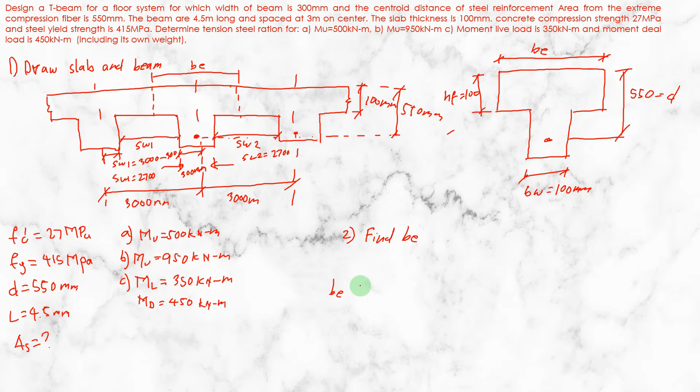So, BE is equal to BW plus 2 times 8 HF. Or in others, instead of HF, they use T for thickness of the slab, not beam. Or others use H. But to make it easier, we'll just use HF consistently.

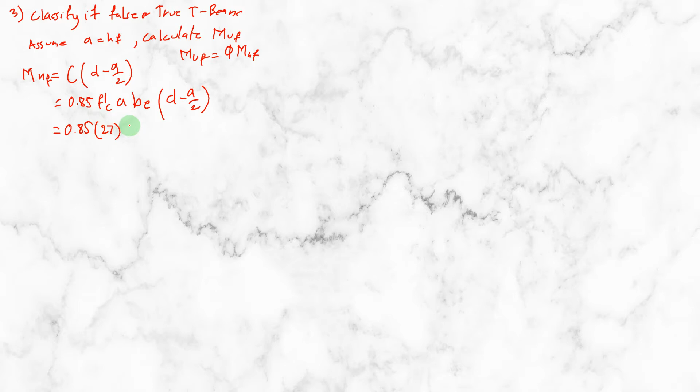So we label it with F for flange only. Then if we equate this capital C with the equivalent equation, which is 0.85 f'c, times a, times b. Instead of B, we use BE, the effective width of the T-beam. So BE, d minus a over 2. Since we assume a is equal to HF, so 0.85, 27 is our concrete compression strength, then a which is 100, 850 here, 550.

Since ang a natin is 100 divided by 2, 50. So ang lalabas dito na MNF natin is equal to 975.375 kilonewton meter. So ang lalabas dito is 975 million, kaya lang i-divide nyo siya ng 1 million para magiging kilonewton meter. Kasi ang unit pa lang natin dito is newton mm.

Ngayon, ang kailangan natin, alam na natin yung MNF, hindi natin alam yung phi. Para sa phi, check for stress. So i-check natin yung stress nito.

Yung alam natin, yung a which is 100, beta 1C, alam natin yung a which is 100. Yung beta 1, hindi natin alam yung beta 1. Kaya lang meron naman tayong table para sa ating beta. Ito yon.

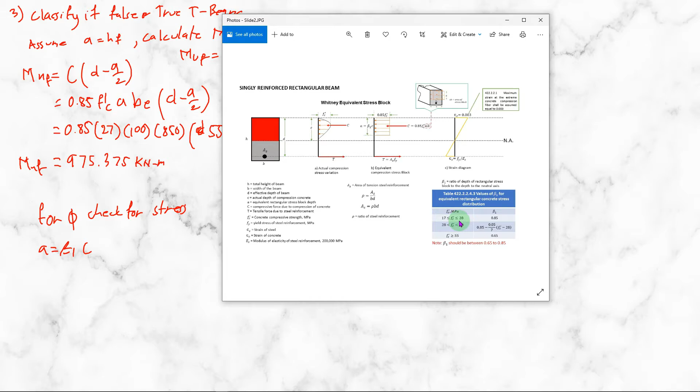Since yung compressive strength ng concrete natin is nasa gitna ng 17 MPa at saka 28 MPa, so meron tayong beta na 0.85. Ngayon, alam natin yung beta, which is 0.85. Beta 1, 0.85. Makukompute na natin yung value ng C.

Yung C is equal to 100 divided by 0.85. Kakaroon tayo ng value na 117.647 mm. So remember, ito na naman yung equation natin na Fs is equal to

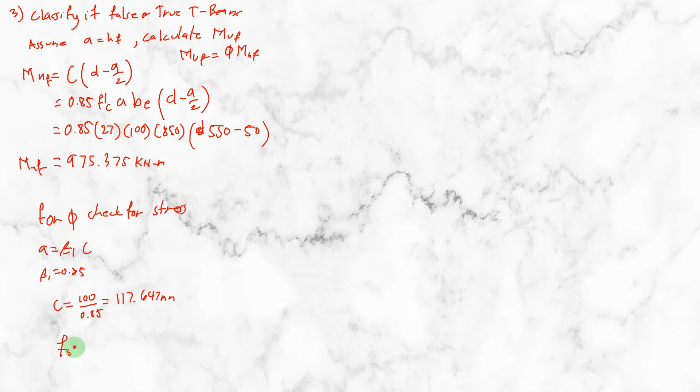D minus C over D. So 600, 550 minus yung C natin na 117.647, tapos 117.647. Yung Fs natin is equal to

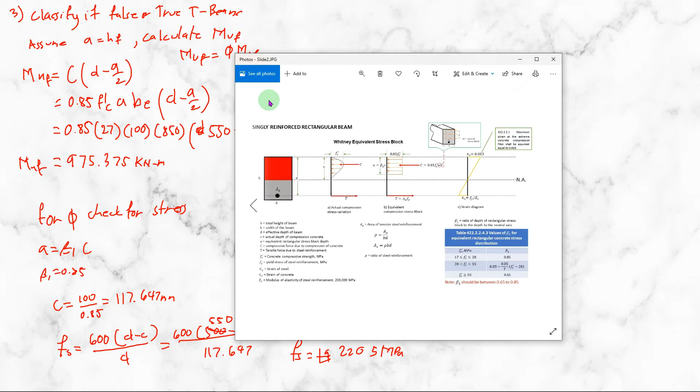Mali. Bakit 500 yun? 550 dapat yun, hindi 500. Recompute. So ang lalabas dito na Fs natin ay 2205 MPa. Ngayon, since ito yung na-compute natin na value ng Fs natin, titignan natin kung saang banda siya nag-fall.

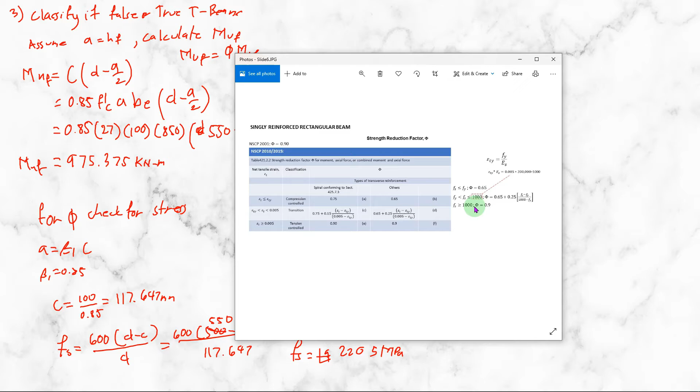Dito natin siya titignan. So yung Fs natin is mas malaki siya kumpara dun sa 1000 MPa. So yung phi natin is 0.9. So phi is 0.9.

Phi, dito na lang sa taas. So MUF is equal to phi MNF. So 0.90, tapos yung na-compute na natin, 975.375. MUF is equal to

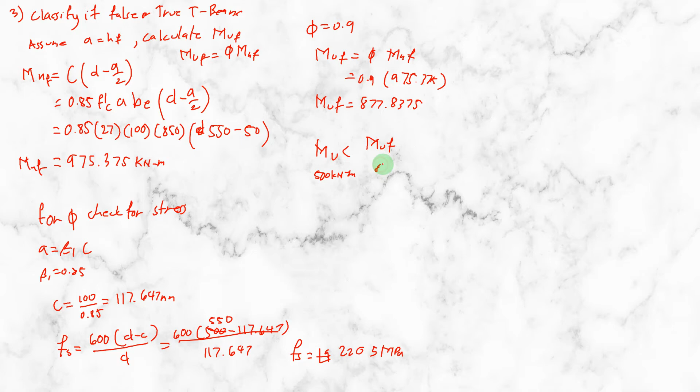877.8375. Dito pa lang, yung MU is less than MUF. Dito lang is 500 kilonewton meter, pero dito naman is 877.8375. So yung inassume natin na a is equal to HF ay mali. So a is less than HF.

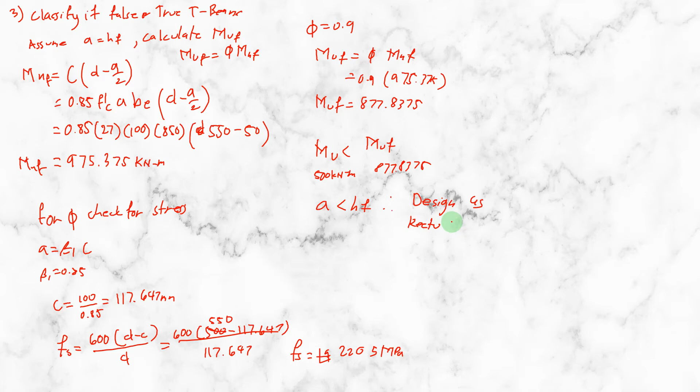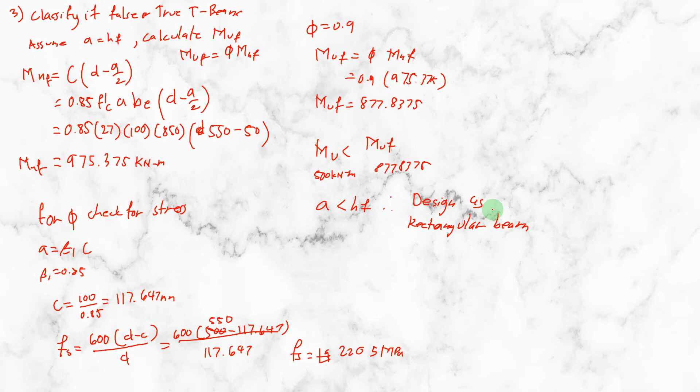So ano yung magiging conclusion natin dito? Design as rectangular beam. Dini-design na natin siya as rectangular beam. So para ma-design na natin siya as rectangular beam, design as rectangular beam.

Ngayon, ito yung tandaan nyo. Kung yung compression, o kaya yung E natin A, is less than HF o yung thickness ng beam natin, automatic na yun na tension controlled yung beam natin o yung section natin. So yung phi natin is equal to 0.9 kaagad.

Ano yung next na gagawin natin dito? Calculate yung ating MN. Ika-calculate natin yung MN natin para makalculate natin yung E o yung MNF, yung actual na MNF para doon sa flange natin. Hindi yung kinompute natin na value na equal yung E natin sa HF. Yung MNF na i-calculate natin is yung value ng A is less than HF.

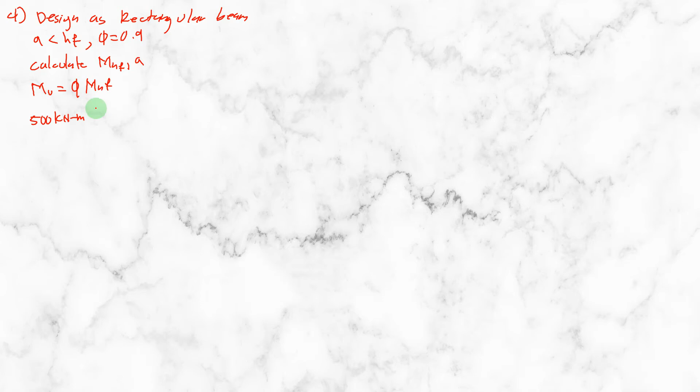Dun sa moment na 500 kilonewton meter, Mu is equal to 0.9 MNF. So yung moment natin dun sa flange is equal to 500 divided by 0.9. So meron tayong sagot dito, 555.556 kilonewton meter.

Ngayon, meron naman tayong equation na MNF is equal to C times D minus A over 2. Kung dito sa equation natin kukunin yung value ng A na to, yung A na hinahanap natin.

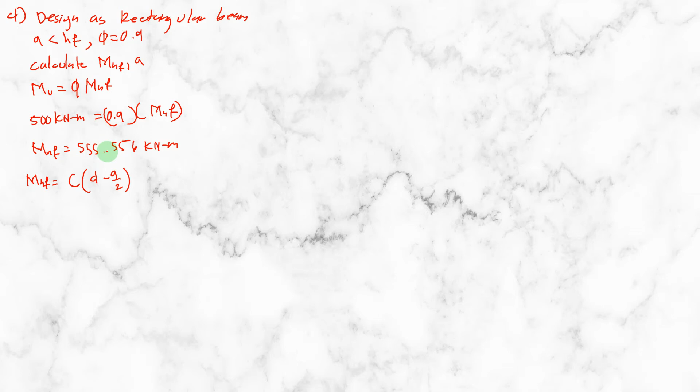So yung MNF natin, papalitan na natin yung MNF natin, i-convert natin siya sa Newton millimeter. So ita-times natin to ng 1 million. So magkakaroon tayo ng 555,556, tapos 00 Newton millimeter is equal. Yung C na to, ipapalit na natin yung equivalent equation ng C, which is 0.85.

Tapos Fc prime, ano yung value ng C prime natin? 27. Tapos yung E, hindi natin alam yung E, so i-blank lang natin na E. Tapos yung BE, instead na B dito, gagamitin natin yung BE na B effective, which is 850.

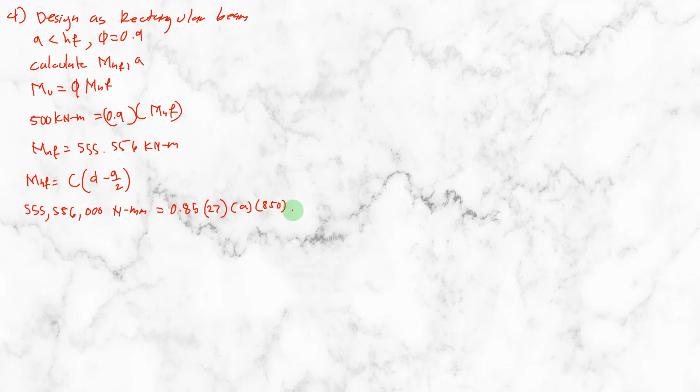Tapos, yung D natin, which is 550 minus A over 2. Kung papansinin nyo to, meron tayong quadratic equation. Kaya pag nilagay nyo to sa calculator ninyo, sa shift solve, titignan nyo lang kasi ang magiging lalabas nito is dalawang value. Meron kayong x1 at saka x2. Ang ipapalabas ng calculator nyo usually is yung x1, which is more than doon sa value ng HF, which is mali. Yung x2 yung hahanapin ninyo.

Pwede nyo naman gamitin yung manual computation, pero kung ayaw nyo, kung meron kayo nung calculator na may shift solve, palitan nyo yung niya, pindutin nyo lang yung sa may banda ng mode, tapos hanapin nyo yung equation, EQN, pindutin nyo yung 5, tapos meron na yung 3 para makita nyo yung ax squared plus bx plus c is equal to 0.

Yun ay para sa equation ng quadratic equation. So, ang kailangan nyo nga lang muna dito is i-equate nyo muna to. So, pagka i-equate natin to, ang lalabas dito is 9753750 a minus 9753.75 a squared.

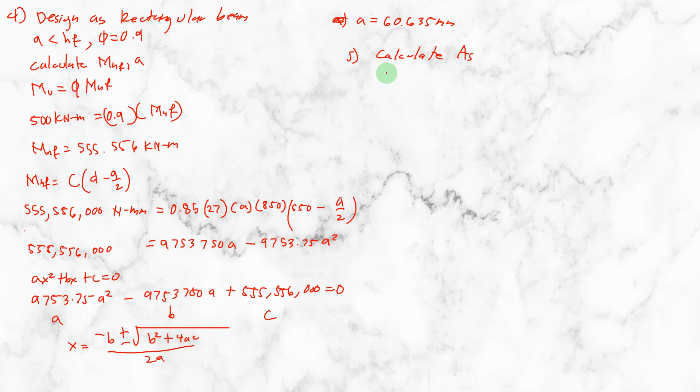60.635 mm. So, calculate 5, calculate AS. So yung AS natin is, para makuha to, is summation forces horizontal is equal to 0. Ito yung C nung flange at saka yung T sa tension. So kung i-equate natin to, 0.85 Fc prime a, yung BE is equal to AS Fy.

So AS is equal to 0.85. Ano yung Fc prime natin? 27. Yung a natin na 60.635 times yung 850 natin over yung Fy natin na 415. So AS is equal to 2850.21 mm squared.

So ito yung AS natin, pero hindi pa natin tayo tapos dito sa AS. Kailangan nating i-determine kung pasok siya sa minimum at saka sa maximum. So calculate 6, calculate AS min saka AS max.

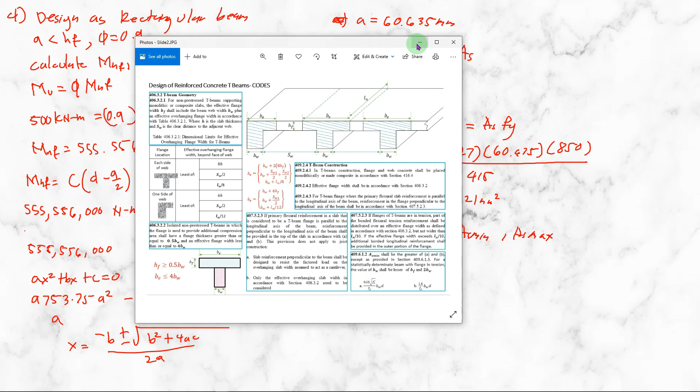So yung AS min natin is gagamitin natin yung ito, 0.25 is square root of Fc prime over Fy. Yung iba hindi, wala yung 0.25 dito sa taas pero nakalagay dito sa baba may 4. Tsaka ito, kung mapapansin nyo to sa rho, kung sa yung ginagamit natin noon na rho is ito yon, tatanggalin lang natin yung BWD na to, ito na yung rho. Kaya huwag kayong malilito doon. Pwede naman natin gamitin yung rho o kaya yung AS min. Kaya lang yung na-compute natin is rho kasi, kaya doon na lang, ang na-compute natin is AS, kaya AS na lang yung gamitin natin.

So AS minimum, it's either kung sino yung mas malaki dito sa dalawa. So 0.25 square root of Fc prime over Fy, yung B effective na BW natin times D. Tapos dito naman 1.4 over Fy, BW at saka yung D. Yung BW na to is yung width ng beam natin, which is 300. So 0.25 square root of 27 over 415 times natin sa 300 na BW, saka times natin sa 550.

Dito naman 1.4, 415, 300, 550. So ano yung lalabas dito sa dalawa na to? So ang lalabas dito is 516.49 mm squared. Sa baba naman, ang lalabas naman ay 556.63 mm squared. Kung titignan ninyo, mas mataas to. So, ito yung magiging AS min natin.

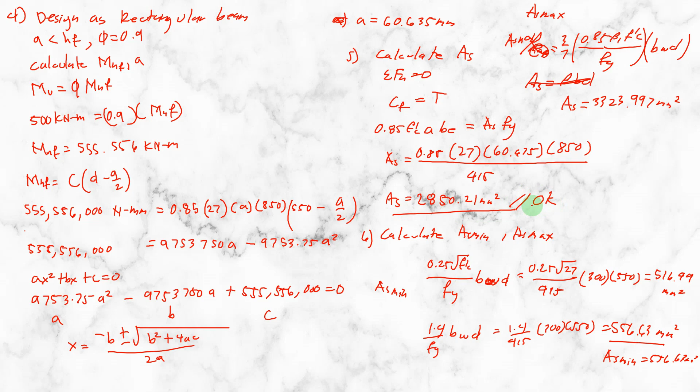3,323.997 mm squared. So kung titingnan ninyo, yung AS na na-compute natin is less than siya dito sa AS max, pero mas malaki siya dito sa AS min. So, okay. So, tama yung na-compute natin na AS.